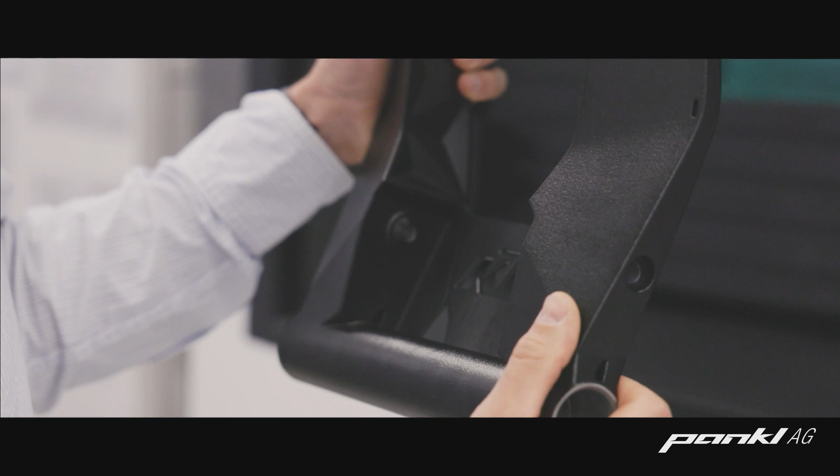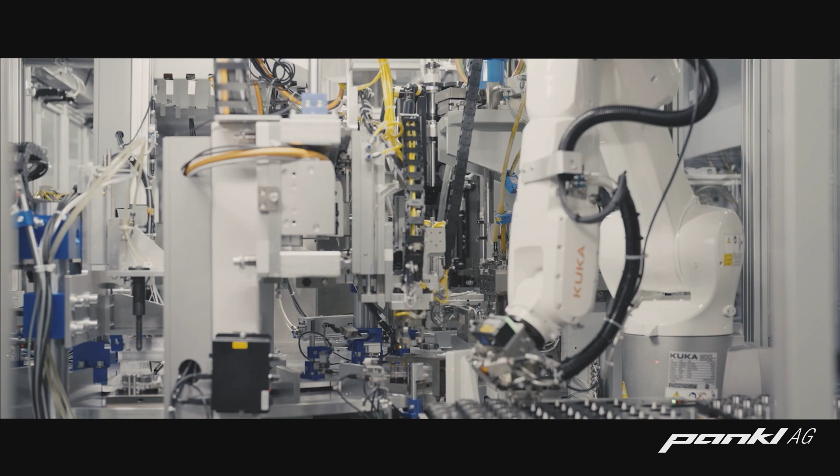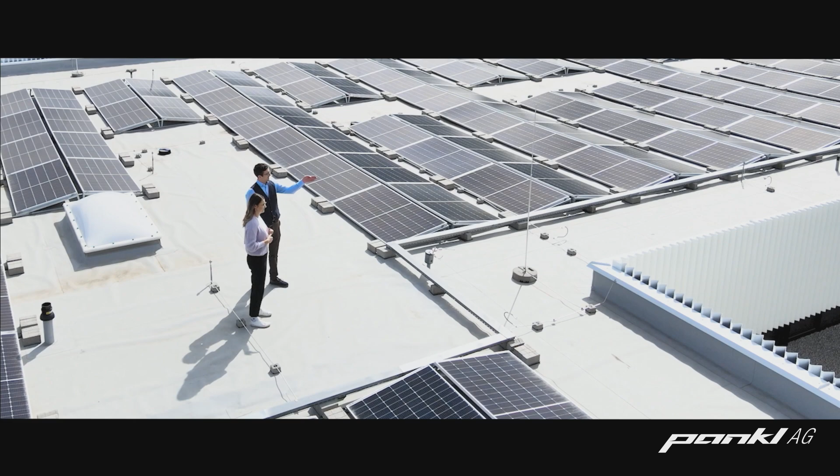Balance. It's the vital force that governs our whole planet. The interplay between rapid progress and mindful preservation, relentless speed and enduring stability. This is the challenge of modernity, a continual balancing act. We at Pankl are on the fast track of technology, yet we steer responsibly and with foresight. Quality is our compass, speed our heartbeat, and smart sustainability our destination. Our journey is a testament that sustainability and technological success can harmonize. It's a balance we refine each new day. Today, we gather to honor this balance and look toward the future. Let's continue shaping the world of modern mobility. High tech, high speed, high quality. Smart transformation is technology driven.

High tech, high speed, high quality. These are our logos, these are the core values of our company, and if you've seen some of these pictures, some of them might seem quite obvious. High tech, yes, we deliver to the motorsport industry, we deliver to the aerospace industry, high performance vehicles, but high tech is in our DNA, it's in all of our engineering that we have. High speed is obviously the speed of our customers, but also the speed of our engineering, the speed of our production, the speed of our response. And high quality is not only the microns of our products, it's the trust that we gained with our customers, the trust in us, the trust in our capabilities.

We started in 1985. Gerald Pankl founded the company in 1985. The titanium connecting rod for BMW in Formula One being our first product. And this is also where the connection with CADFEM started, because Mr. Müller and Mr. Pankl, they were discussing the first optimization of titanium connecting rods.

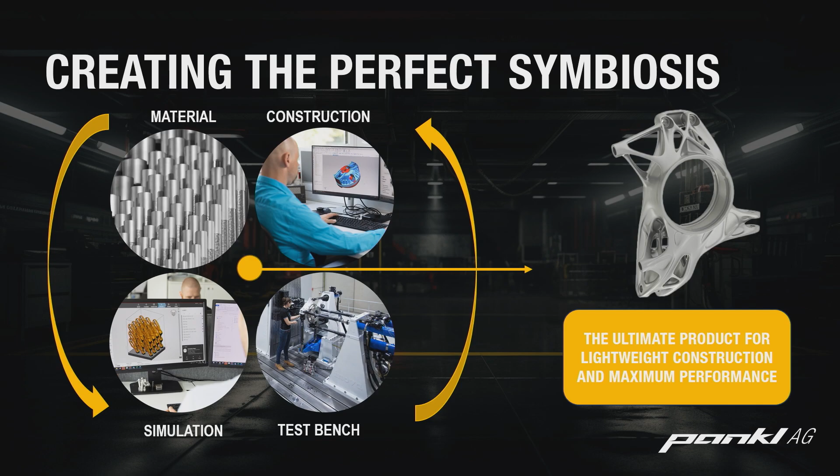There's a very, very long straight, so very low downforce and very high speeds. And for some reason, I don't think it's purposely, there is a bump right in the braking zone. So there's a very sharp corner where the cars are braking, with a lot of force on the front wheels, and exactly there, where you have all the load of the car on the front wheel, there's a bump. It happened to be there.

Additionally, at that time, the team was using a very new aluminum alloy with unbelievable strength and properties, besides elongation to failure. This was the reason — it was not properly tested, and this is also one reason, because it had very good properties in the L direction and LT direction, but if you know a little about forging, the short transverse direction, the ST, is the critical one. You always have to look at the worst case properties, and they were horrible in this case.

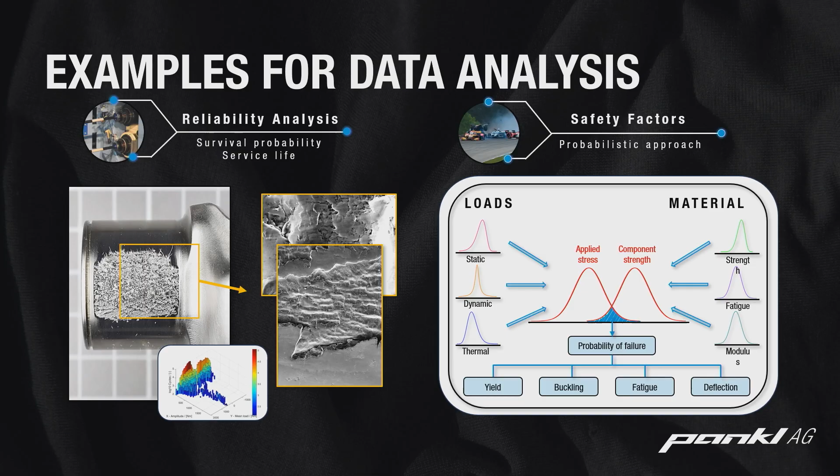This is really because we have dedicated heat treatments and dedicated surface finishes, so we need to collect all the data we use in design and simulation ourselves. We have various rigs, so we can generate material charts and load charts and match them with each other. The first step is to have the data, to test it through coupon testing, static testing, and fatigue testing, but the next step is to optimize it.

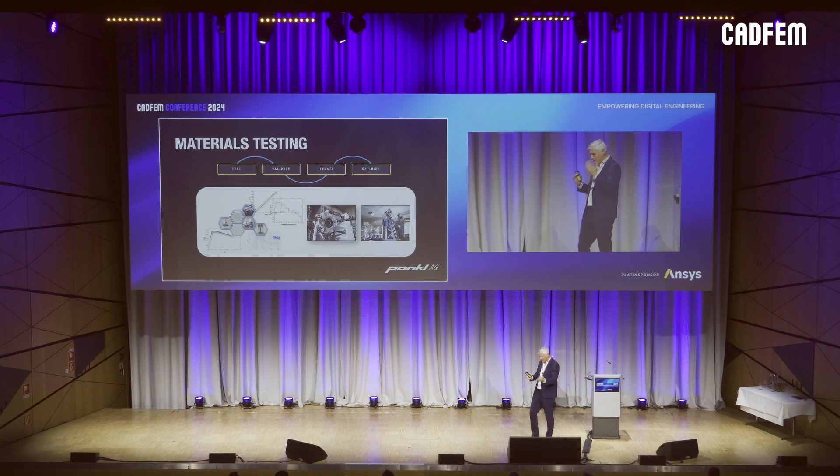That's why we also decided to invest heavily in heat treatment facilities. We have aluminum heat treatment in-house, titanium, steel, vacuum heat treatment. We have plasma nitriding in-house. We also have our own HIP for hot isostatic pressing in-house, which enables us to tune the processes. Everybody can invest in these machines, but first you need the money, then the right people to operate it, and then the skill set to turn the right knobs to make dedicated heat treatments. Whenever you go to a supplier, they normally have dedicated processes where you can get a very good cost-performance ratio.

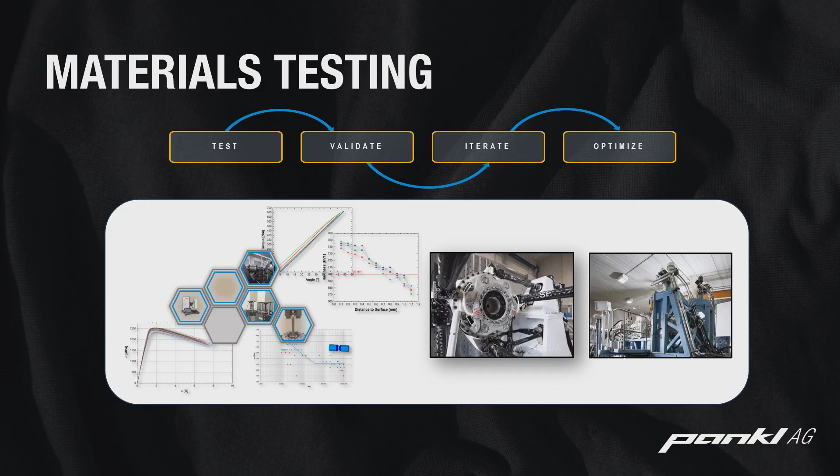Whenever you want something exotic, normally the cost is exponentially higher. And that's why we said we want to have our own handle on it - have the handle on the quality, have the handle on the lead time, and have the handle especially on the engineering side.

And then, once we've done all of that, we validate it on our rigs and feed this back into the optimization cycle. Now, where does the digital transformation come into play here? Obviously we started, like most of you here, quite early with CAD systems and simulation tools, which I think puts us quite far ahead in our digitalization roadmap, introducing topology optimization now for the new potential production methods and techniques that you have.

A very important step we're currently taking together with ANSYS and CADFEM is the introduction of ANSYS Granta here, because I mentioned about all the material data that we have - like in a lot of areas, there is a lot of data, but not a lot of information and knowledge coming from it. And that's exactly what we want to do.

We want to combine all the information, all the results we get from our tensile testing, from our pulsing, all the samples we send to our customers, everything we collect from a test rig, and feed it into our database - generating more accurate knowledge on the materials, which is then the basis to really optimize the lightweighting of the components.

And last, we take this data, this engineering, and also optimize our manufacturing methods, digitizing the manufacturing using new tools like additive manufacturing, which I will come to in a minute.

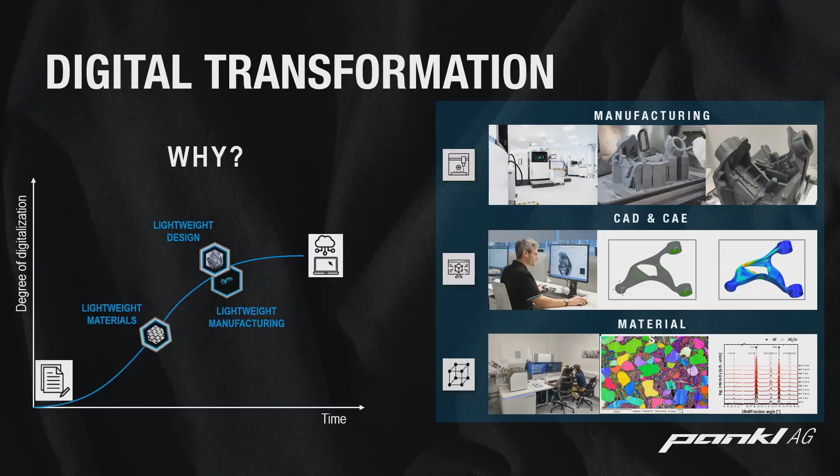We talked about engineering, being an engineering partner to our customers, but we are also a system supplier, as I mentioned before. We have numerous production technologies in-house: steel and aluminum forging, 9 steel forging presses, 3 aluminum forging presses dedicated to high volume production for automotive. Steel and aluminum casting, but only for our brake discs - high performance, lightweight brake discs, which are manufactured in-house.

Steel and aluminum press sintering, especially as subcomponents for the pumps. Additive manufacturing - 8 additive manufacturing machines, all kinds of CNC machines from gear manufacturing, gun drilling, honing, 5-axis machining, mill turns, you name it - and the heat treatment that I just mentioned. All that combined with the engineering, the testing, the assembly, and a lot of services afterwards.

I mentioned the scanning electron microscope for failure analysis of the parts of our competitors. Ours don't fail. And obviously the digitization part with the electronics in here.

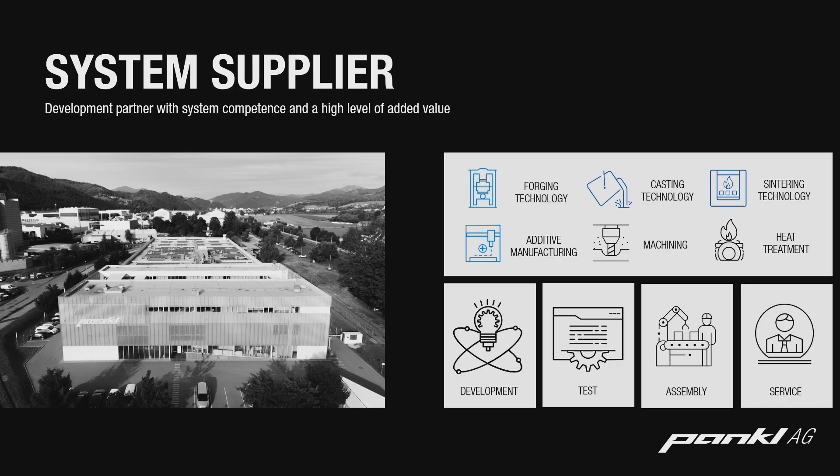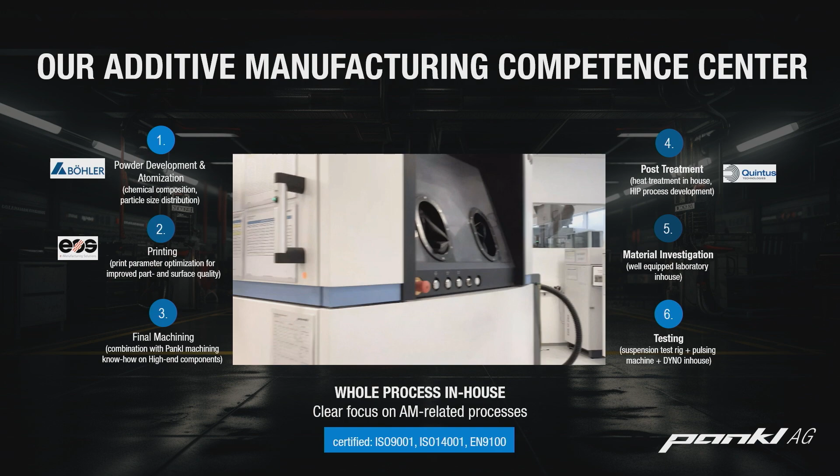Why do we believe in additive manufacturing? We generated an additive manufacturing competence center, which is amongst the leading ones in Europe, and I think amongst the biggest ones globally as well.

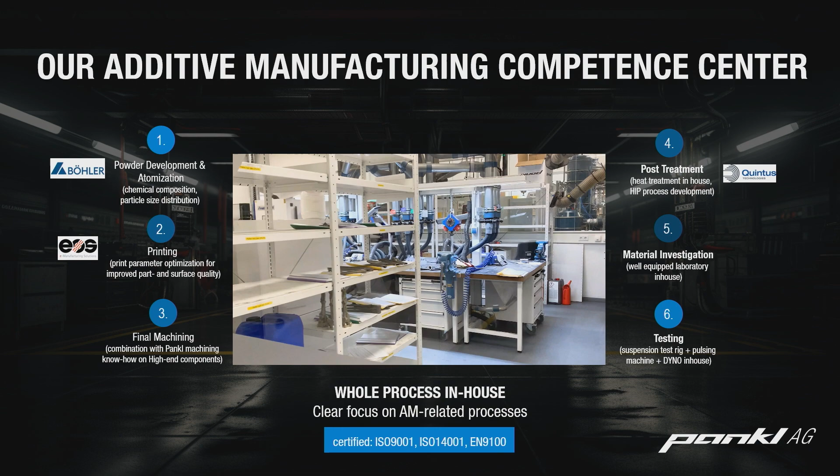We have a cooperation with Böhler here on the powder side. Böhler Special Steels is manufacturing dedicated powders for us. We can also use all their laboratories for powder investigation - the rheology, the sphericity, the gas content of the powder, which is again key here for the performance of the components.

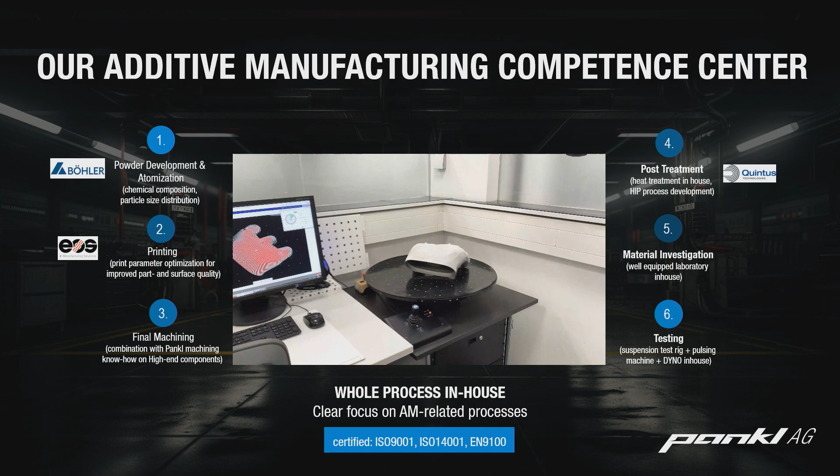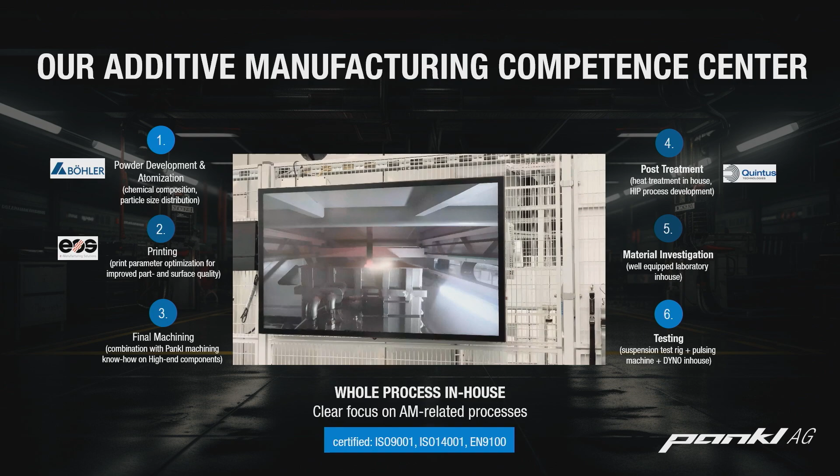We have a partnership with EOS, the Munich-based company, on the machines. We are a technical partner there, involved in their pre-development, testing, beta testing new machines, and involved in the software development they are doing in the industrialization.

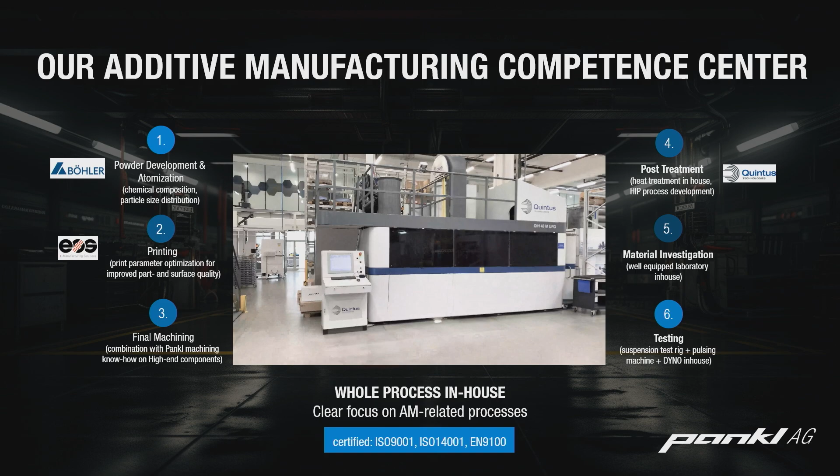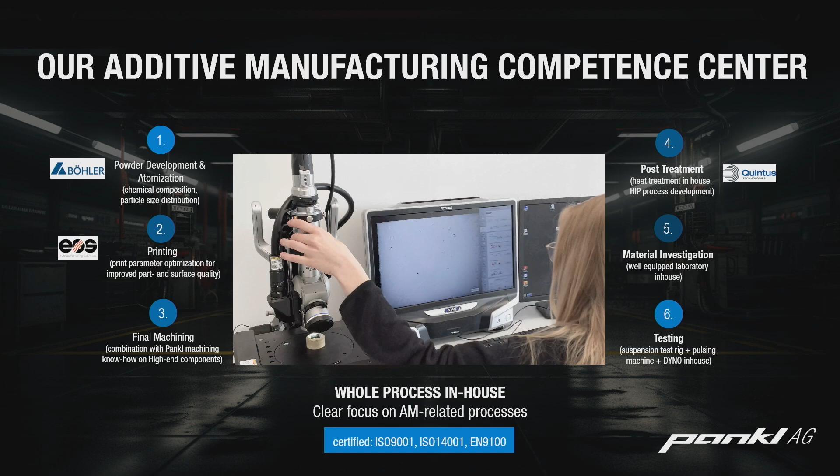Obviously, the final machining, as I mentioned before, is in our standard Pankl divisions. The heat treatment, post-treatment - the post-treatment also in regards to surface finish, surface optimization, material investigation and testing. All of that under one roof, and you can see again here a holistic approach, because we want to have a handle on the complete process.

Optimizing the additive manufacturing - why do we believe in additive manufacturing? Because we think there are several benefits here.

And I like to quote Albert Einstein on that - you might know this quote: 'The world as we have created it is a process of our thinking. It can only be changed by changing the way we think, changing the way we act.' This is very important, because if we tackle additive manufacturing, if we want to engineer products with additive manufacturing the way we've done it before, we will not explore the total benefits that can be achieved.

There's more freedom to design and innovation, lightweight construction, but in a lot of areas we have to stop thinking in materials. We have to think in functions. What are the functions that we need? Because it could be that in additive, something in titanium makes more sense than in aluminum. We have to think, what is the final requirement here and how can we do it?

Lattice structures, for instance, is something where we do a lot of engineering on, because if you go to some of the additive trade shows, you will see a lot of components that are done with lattice structures, but with basic engineering and mechanical structural understanding, you will understand a lot of them will not work.

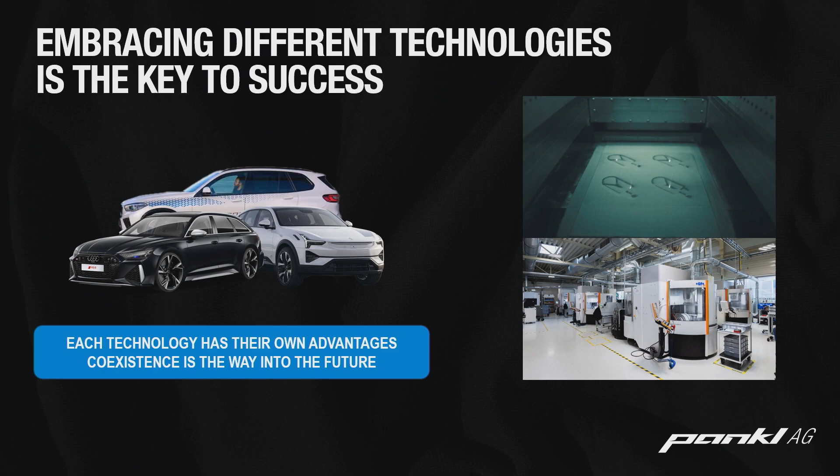And it helped us to rise to new heights. In motorsport, obviously, already in the past, we conquered pedestals. But using additive manufacturing will be our key to secure that in the future.

For instance, 2026 engine regulations, you mentioned that before. There is a big focus on introducing this hybrid technology, which they have now already, by the way, as well. But they're going to increase significantly from approximately 20% to 50% the hybrid content. Still, there is a massive development on the internal combustion engine, which has to be done because the efficiency on the combustion engine will still bring 50% of the remaining power.

And, by the way, as Formula One opted against drive shafts in the front, which is a pity for us because we deliver drive shafts there. We would have had 4 on the car, but now it's only 2. There is not so much recuperation potential because on the front you could recuperate a lot of energy. Now they are only recuperating on the back, which means in order to get all this energy, they might be forced to power the battery or to charge the battery with the internal combustion engine. Which means we need to be very efficient with our internal combustion engine in order to get all the battery charged up and ready to race on the long straights.

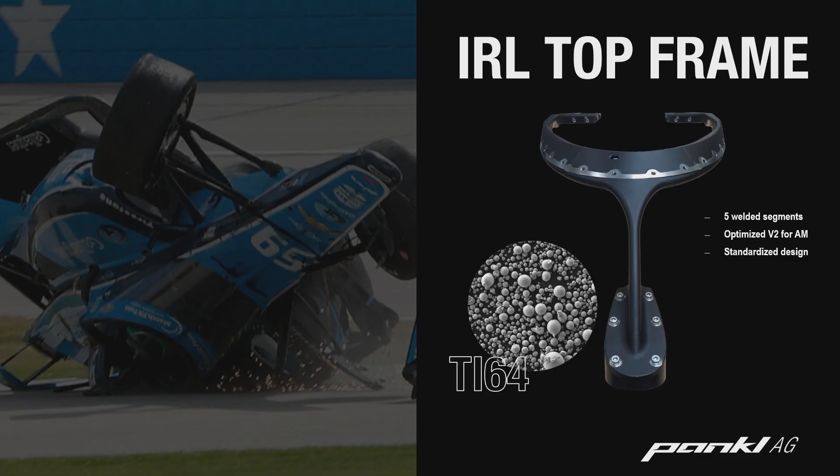Obviously, none of us want to be sitting in that car. But you might have heard of the top frame. It looks very similar to the halo in F1, but the top frame has a shield. You can slightly see that here. There's also a shield around there.

We are the one-make supplier to the Indy Racing League. This component is printed on an EOS M400-4, with 4 lasers working simultaneously on this machine, printed in titanium, 5 components welded together. Almost every second week we get an email thanking us for saving the lives of those drivers. This is done with additive manufacturing, understanding the structure, understanding the behavior, and using this new methodology.

Why is additive so important here? Because it is a structure which has to be very rigid, it has to sustain the crash load. But on the other hand, it is so high up in the car that it needs to be as light as possible for the center of gravity.

We conquer space. Obviously a bit tricky in terms of confidentiality, that's why I was told not to show too much of the components here. But space industry is very key for additive manufacturing—low volumes, weight, very essential. Most of the parts are done in 316L. Here, this is a big potential for additive manufacturing.

And last but not least, we use our group synergies and we can unfold the magic of additive manufacturing.

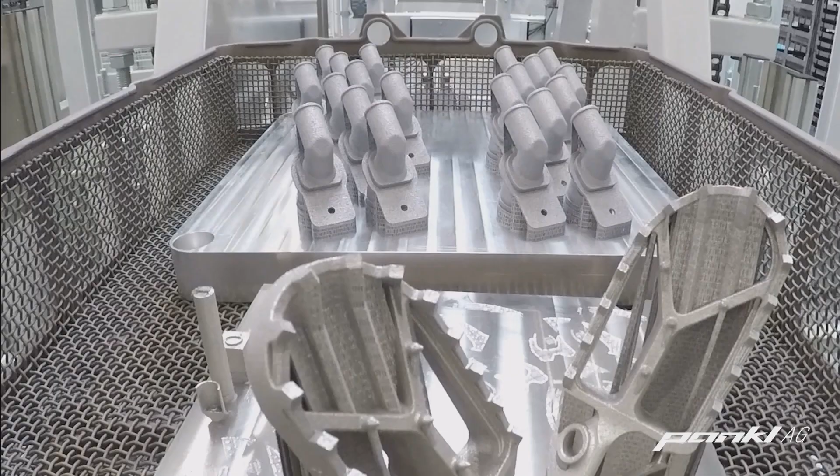Our cooperation with KTM—obviously there is a lot of potential for additive manufacturing. We looked at the footrest already, you've shown that in your simulation. A very good tool, a very good part printed in additive manufacturing. But there are a lot of other parts where we help our sister company KTM in improving their performance on the racetrack.

But not all that glitters is gold. Especially before COVID, there was a massive hype around additive manufacturing. Almost every company said we need to have additive manufacturing, it needs to be there, it will revolutionize the world. And then it all ebbed up because we found out there's a price tag to it. There are technical challenges, repeatability, there are engineering challenges. So we really came out of the trough of disillusionment, and we are seeing an increase now in a lot of areas.

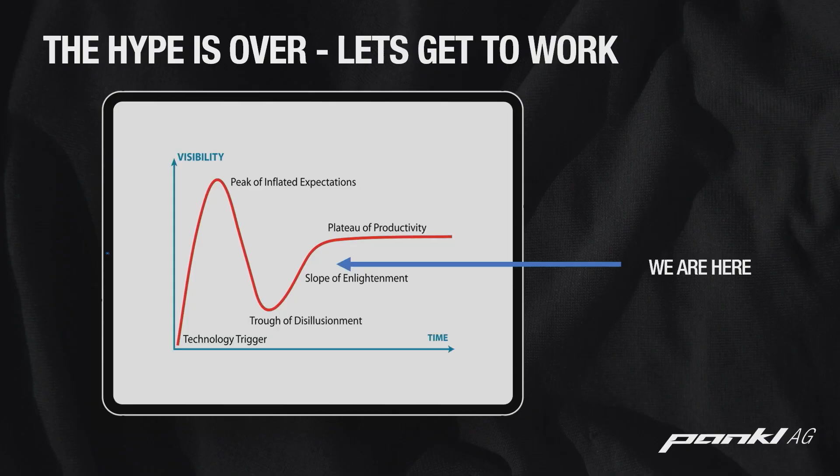As I said before, focusing on the right application is the key, and there are three main areas we have to address. The first is productivity—you see here these are the footrests. We have a very special program with EOS called Smart Fusion and stacking, where all of a sudden we can increase the part count per print job from initially 36 pieces to now more than 120 pieces. This is reducing the cost by at least 50 to 60%, and this is obviously a massive game changer.

Will this be mass production? No, it will not be mass production, but it will open different doors and it will be key to move forward. Post-processing is a very painful thing here—all the deburring, all the manual rework. This is all cost, labor cost, that we need to reduce and optimize.

But finally, it's the quality. The quality is key, and that's also something where we want to work together with ANSYS and CADFEM to work on solutions that can really measure the quality and performance in situ, and determine if we have to reject a component or not.

There are tools that monitor the melt process, and now we have to correlate these tools using simulation, machine learning, and feature recognition to really direct these properties to the component and have a decisive tool for us to know if we can use the parts or not. Because the more we can improve the quality, the less we have to use CT scanning and extra cost. Again, the more it will enable us to use additive manufacturing for lower cost applications.